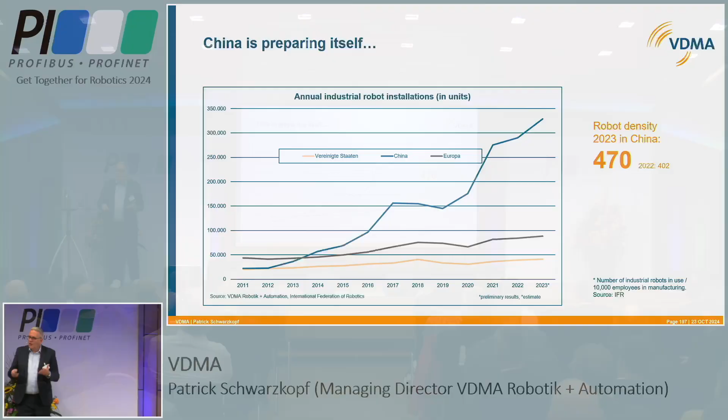It's a very important diagram, I should say, because this shows the annual industrial robot installations. You can see from maybe 2013, 2014, China, US, and Europe are basically at the same level. Then from about 2014, 2015, you just see China taking off. Every year China installs 51 or 52% of all robots installed in the world, and the rest of the world installs about 48%, which is tremendous.

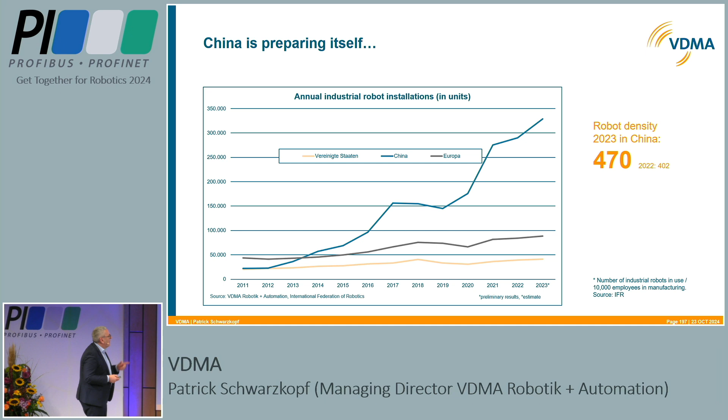China is preparing itself for the demographic problems they're running into big time because of their one-child policy and so on. We said China's robot density was going to overtake Germany very soon, and Helmut said exactly this today. I have the latest figures now, not yet published from the IFR: in 2023, last year, there were 470 robots used in China per 10,000 employees in the manufacturing industry. The year before that was 402. It has overtaken Germany in robot density.

Now with 429 robots as a robot density in Germany - grown from 417 to 429 - but in China it grew from 402 to 470. So last year we were overtaken by China, and China is now in third place after Korea and Singapore, with Germany in fourth place. Now we have the situation that China is more heavily automated than Germany.

So maybe we should think about what we can do about this. There are basically 4 challenges that we see, I think you know them. You have climate neutrality, sustainability, circular economy, fuel cells, hydrogen economy, batteries, e-mobility and all that. We need automation to make this economically viable.

We're sitting on a demographic time bomb. We don't have enough people. It will limit the potential for GDP growth in Germany and in Europe.

And also look at lab automation. We don't have enough people. The baby boomers, my generation, will leave. There's nobody in the blood labs. You need your blood test, it's a matter of life and death, and you need that test within 24 hours. We need to automate, we need lab automation to deal with this problem. We have a lot of areas where we don't have enough people, and therefore we just need to do something about it.

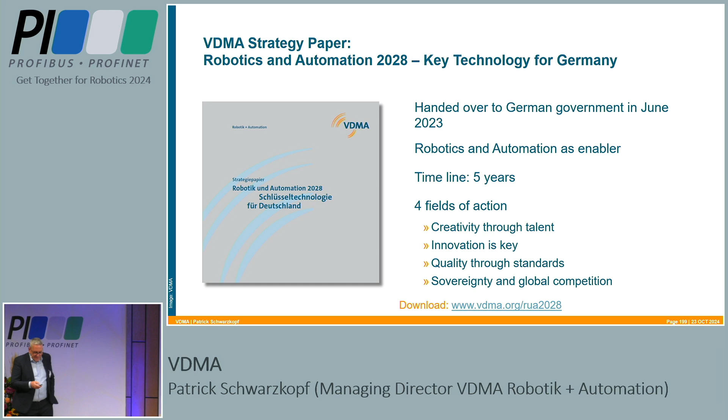So we wrote in a hurry a big strategy paper, Robotics and Automation 2028. We did not want to call it the 5-year plan of robotics, so we said 2028 is the same thing. We did that and handed it over to the German government in June 2023, the time of Automatica. It has a timeline of 5 years and 4 fields of action. I don't have time to go into it, but you can read it at vdma.org/rua2028. I think you'll get the slides anyway - it's available. I have to be quick because it's a lot to cover in 20 minutes.

So the German government has really then, I must say, done a lot in a short time.

First of all, the BMBF, the Ministry for Research and Education, came up with an action plan for AI-based robotics. It's only 20 million euros, but they said we need to connect and bundle all the cutting-edge fundamental and applied research in Germany so that we have like a Stanford or an MIT. We have all that stuff, but it's a little bit here, a little bit there, and nobody knows it. It's not a brand, so we need a brand for this, and we need an umbrella that connects that into one network that will attract talent from all over the world.

And that's the RIG, the Robotics Institute Germany. That has just started in July. It's 10 universities, associated partners, and it will run for 4 years. Early days, we'll see what happens. But that was a result of the activity of the Future Council of the Chancellor - many of you will have heard of it.

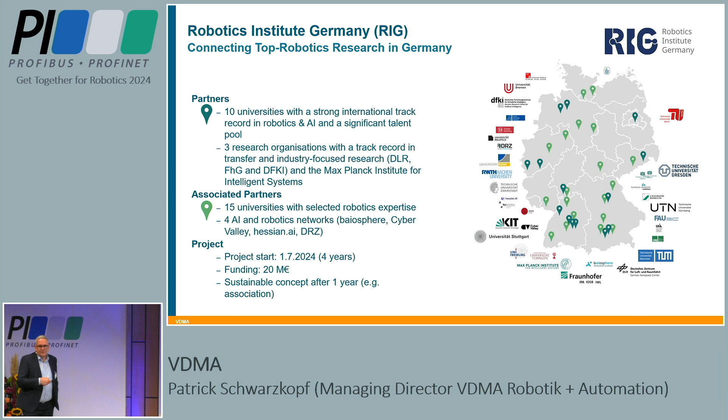The second thing is very interesting, I'm very proud of it - it's the project RoX. The Future Council said we want an industry consortium where actually the customers, the users of robotics, will define their pain points. And that is really application-oriented. So we said, okay, we find that's a good idea.

They named it a robotope, like a robotics ecotope, whatever. But basically it's the idea that you have a consortium where the users of the automation technology call the shots and say, this is not working today, this is what I need, do it for me please. And this is exactly what happened. In really China speed, I must say, this was set up with 24 partners plus 8 associated partners - we have Würth, Mercedes-Benz, Fiege Logistics, Boehringer, Wacker Chemie, Rheinmetall, Lidl, and all these companies.

And they have 4 use cases in that project: loading and unloading of containers automatically with robots, not an easy job; commissioning and kitting within manufacturing; high mix, low volume automation with new concepts; and use case 4, AI-based virtual commissioning. The idea is you have a product you want to produce and the AI will give you a design of an automation solution, which you can check whether it will work or not, to make the integration or setup of an automation system a lot cheaper and a lot faster.

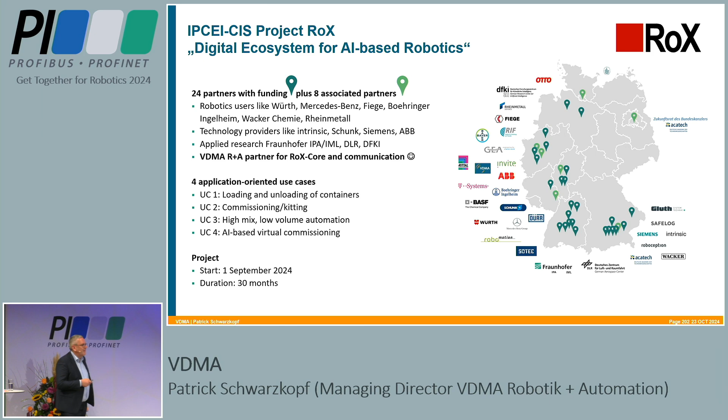Another thing the government wants to do, which we don't really want to do, is come up with some kind of frankly crazy idea of using some NCAP crash test system to qualify robotics as very good or better. We said this is not working with industrial robots. A robot or robot solution application is either safe or it's not safe. You can't say it's a little bit safe or a little bit more safe.

We have the ISO. We don't think this is a good idea, but for professional service robots ready to use - how good is the interface, how reliable is it, how safe is it - maybe there's a quality seal that's coming. I'm not spending more time on it, just so you know.

But I mean that headline here, Wirtschaftsministerium plant crash tests für KI-Roboter, says it all - Economics Ministry plans crash tests for AI robotics. That's the kind of headline I don't want to read.

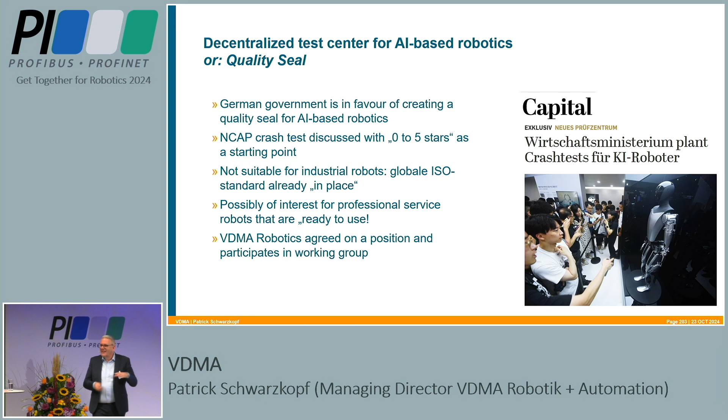But the government also said we want an annual robotics conference in Berlin, and they did it in record time. It was there in June, and that was organized - 300 people there. It was fantastic.

And in that time, we had our annual review meeting with the German government, where we talked about the progress and where we need to do more. So that was 4 ministries and the Chancellery. And we came up with 6 requirements.

We said we need more competitiveness for the Standort Deutschland - Germany as a place to do manufacturing industry business. We need to take measures for more venture capital, especially for scaling startups.

And there something has happened tremendously, maybe, because France has had a brilliant idea to say: we have enough money, there's so much money, and that money is with institutional investors like Allianz, pension funds, whatever. We need to change the regulation a little bit so these guys can put a little bit more of their trillions - I'm not talking about billions, trillions of euros they're sitting on - into innovation.

And this has happened in France, which has already, in just 3 or 4 years, had 6 billion euros additional venture capital. You can really see it - it's overtaken Germany. And Germany is doing the same thing now under the WIN initiative.

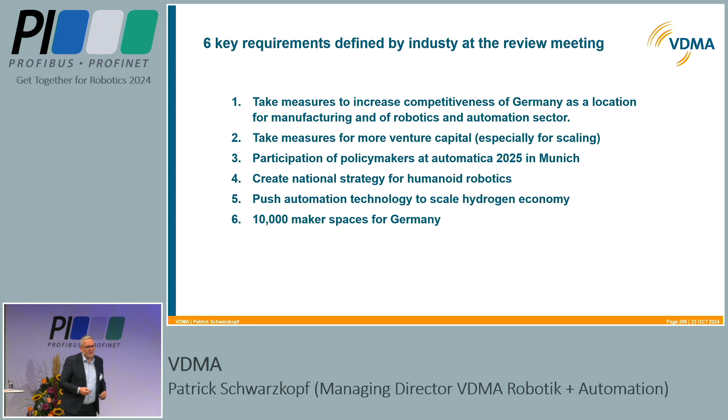So we want policymakers to participate at Automatica in Munich. We want a national strategy for humanoid robots in Germany, and we want to push automation technology to scale the hydrogen economy. And for Germany, we want 10,000 makerspaces at schools to foster and nurture the next generation of techies, which we need - otherwise this is not going to work.

We're doing a European strategy paper as well, because we're a European organization too. I can't go into this, but basically the same ideas. This will be published at the end of the year, targeted towards the EU - the Commission and so on - but also every European nation. The basic requirement is that every country should have a robotics strategy in place. Denmark probably has it, Germany now has it too, more or less. But maybe Romania or Bulgaria - there's a lot to do, and every country can do something.

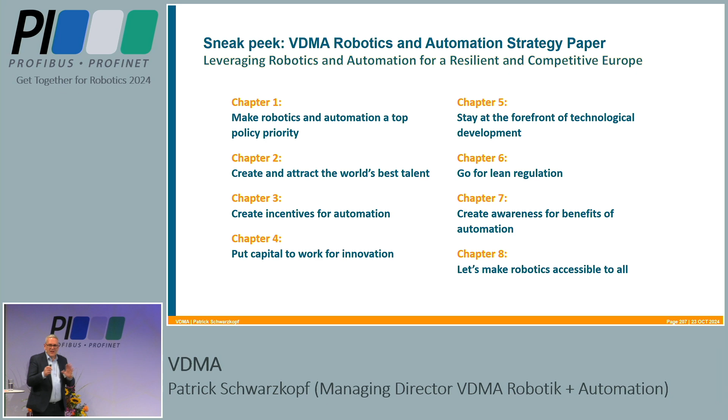So, a new breed of robotics - only 5 minutes left. Are we ready for the race? So basically, we have new types of robots.

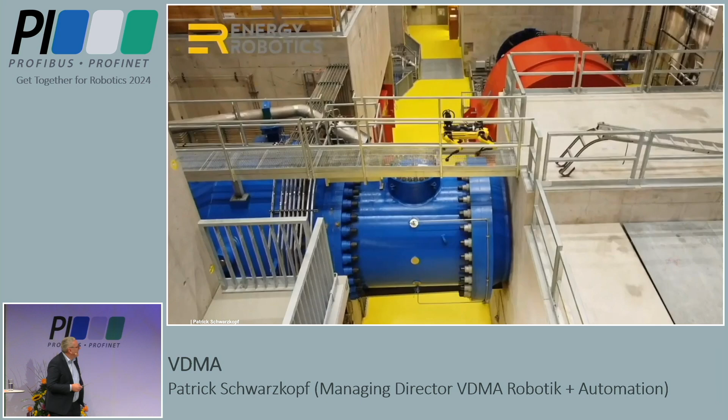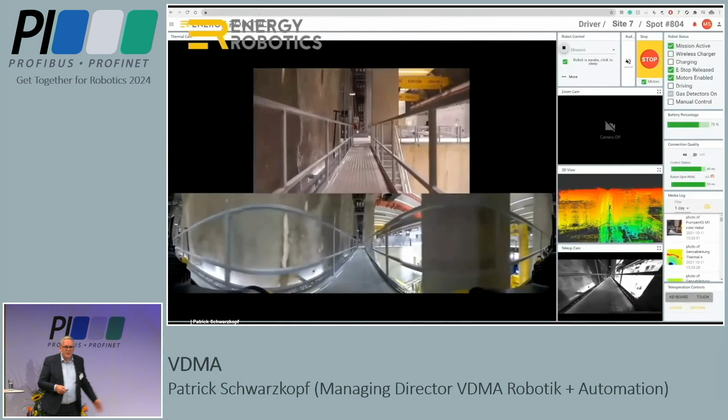It's energy robotics - we have robot dogs that can walk steps. This is in use in critical infrastructure. We have different types of robots, like the EvoBot from Fraunhofer, which gives more agility. I think it's a very clever little gadget.

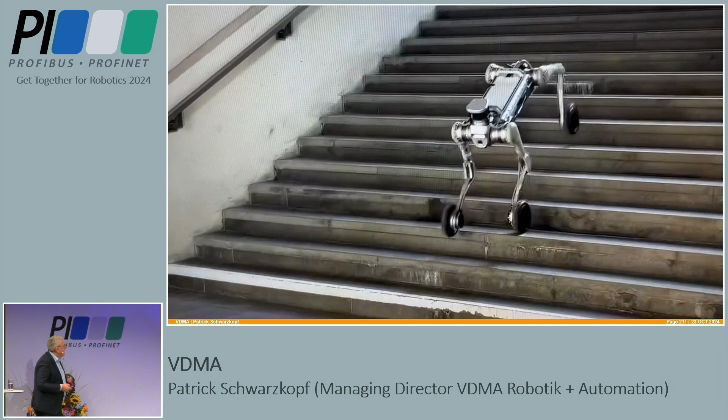And we have robot dogs that actually have not only legs, but also wheels, like the Swiss-Mile, just produced. It's quite impressive.

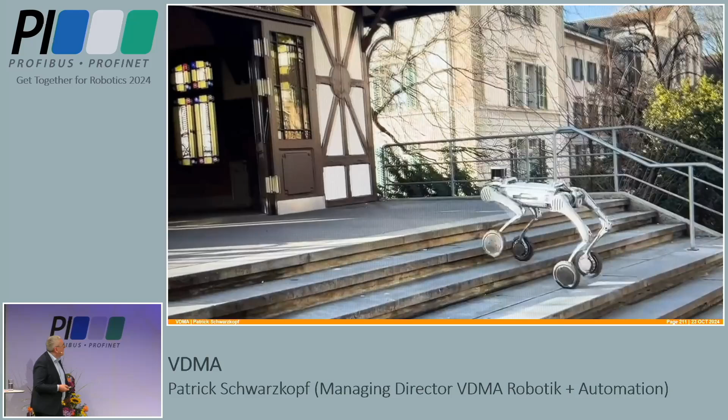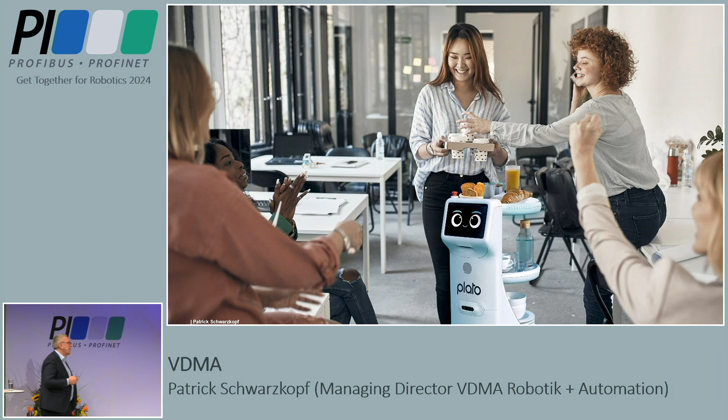So what does that mean? What is this new breed of robotics all about? Rainer Brehm said a few things the other day, that at the end of the day, I don't want a rule-based but a goal-based automation. He also said, we don't want to train the object, we want to train the skill of handling, of doing something, or automating the unpredictable.

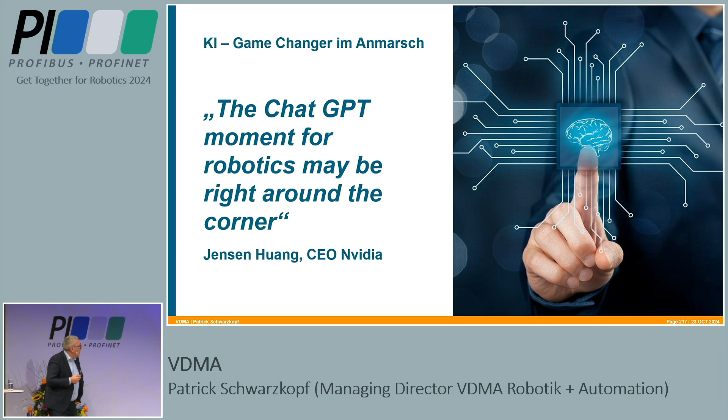And Jensen Huang, you probably know this quote, said the ChatGPT moment for robotics may be right around the corner.

Some of you will be engineers, you know this, but you have deterministic systems where every movement is predetermined, it's clear. And then you have, on the other hand, AI use, neural networks, more of a black box approach.

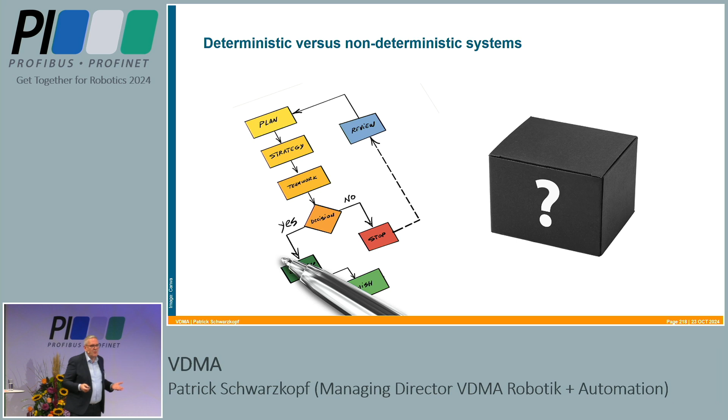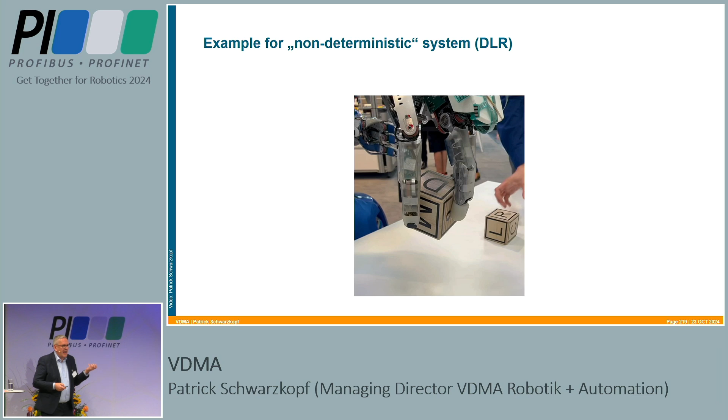This is an example from the DLR, German Aerospace Center. You give this gripper, this hand, a cube, but it's not predetermined how you give it to the hand, and it's not predetermined in which direction the hand turns it. Like a kid would do it, huh? So that's a non-deterministic system.

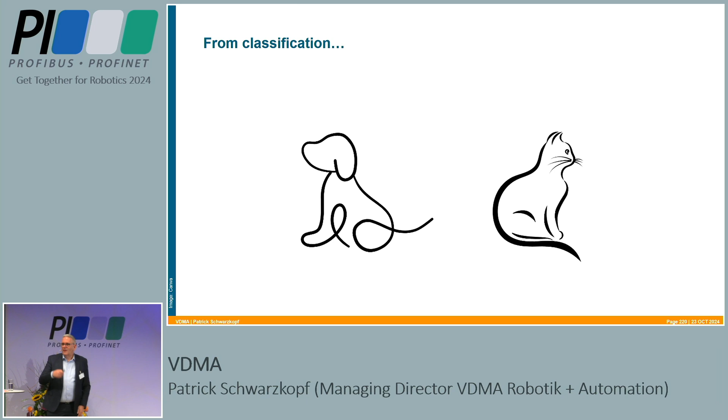So when we used AI in the last years, we were using it more for classification. Is this a cat? Is this a dog? Does this bathtub have a scratch, or does it not have a scratch?

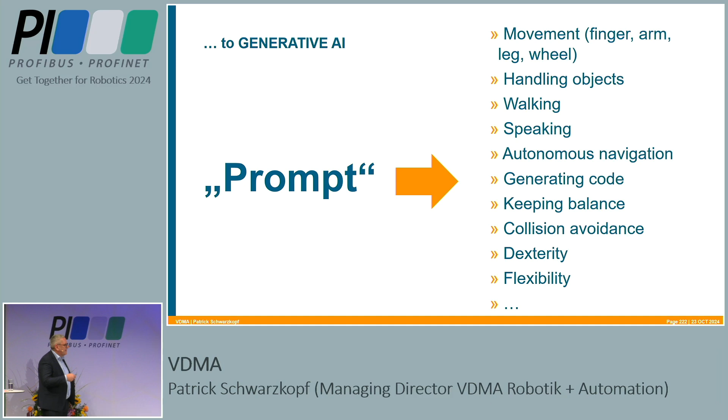You know, you have a prompt, like you write something in ChatGPT. But what could come out in robotics is a movement of a finger, an arm, a leg, a wheel, handling objects, the skill of walking, the skill of speaking, the skill of navigating autonomously, the skill of generating code, keeping balance, avoiding collisions, dexterity, or flexibility.

And so we have a situation where we move from programming to imitation or transfer learning. People who wear a motion tracking suit, that's the prompt to the robot, or you have telemanipulation, and this data is the prompt for teaching a robot skills with foundation models. They're more generic skills. Or you just have observation of humans in videos or with cameras.

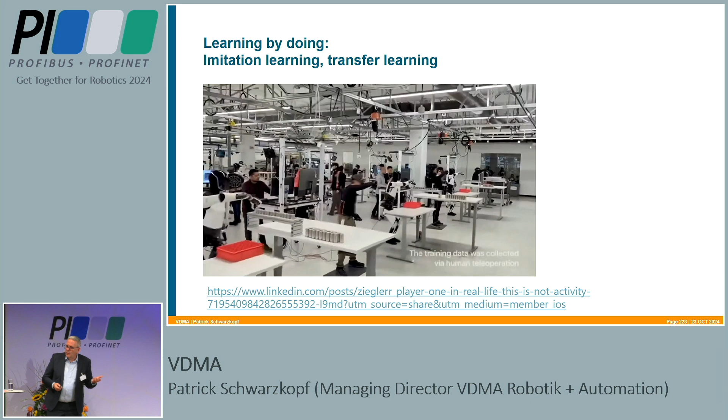Or you move to the totally virtual sphere. I think you've seen that from NVIDIA, where you train the AI with realistic models.

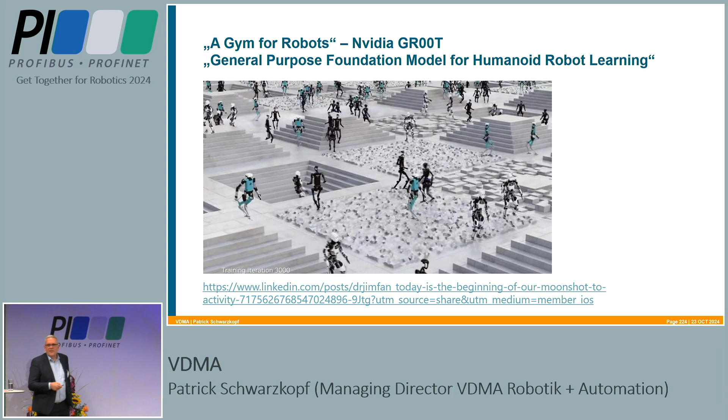So then I want to make a comparison which I think is important. It's 2014, I'm at Automatica. Neelie Kroes, European Commissioner, comes and says, I inaugurate SPARC. It is the largest civilian-funded robotics innovation program in the world, 700 million euros for the next 7 or 8 years.

Now, we have one AI startup in the US, barely 1.5 to 2 years old, which raises the same amount of money in the B-series round. And this should make us think, because there's just so much investment going in. Also, the Chinese government has a very clear-cut strategy for humanoid robotics in China. They have a goal.

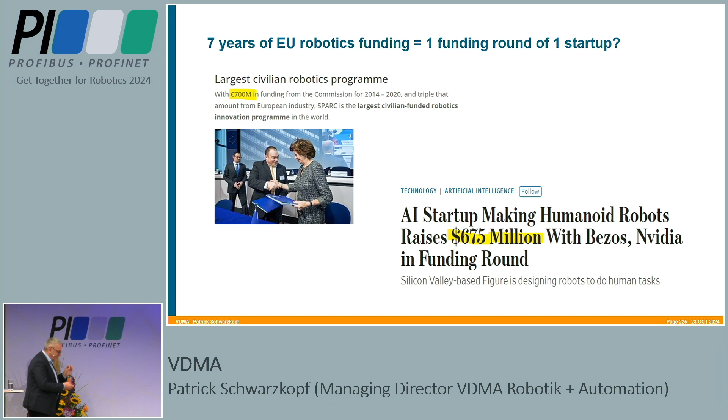So I think the new way of learning, of teaching robots, will also eventually have a big impact on how we use traditional industrial robots. And it's not about the leg, it's about the upper body. It's about eye-hand coordination. And that is equally interesting for a cobot that's just stationary. So all the discussion that legs are unnecessary is distracting us from the discussion I think we should have.

So, what's it gonna be? Are we voraus, ahead, leading the revolution? Or are we behind and trailing? So with this question, I conclude my presentation. Thank you.

Thank you very much, Patrick. Nice to know what your dog looks like. Sorry, 2 minutes too long, but... No, that's fine. Now we know what your dog looks like, so that's okay.

And it was great to see those statistics there, and I think they really underline, especially what Helmut was saying in the roundtable, about the competitiveness of Germany compared to the rest of the world.

Again, one eye on my watch. Maybe we can squeeze in one question. Who's going to be the lucky person in the room who gets to ask it? Does anyone have a question for Patrick? Scared you all. They're all hungry, aren't they?